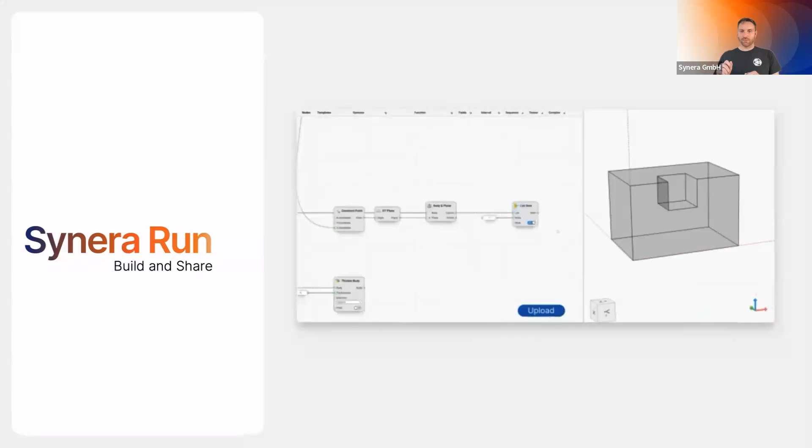So let's continue. What is Synera Run? Synera Run allows you to build, share, and reuse workflows within an organization. It's as simple as this: you still build your workflows as you're familiar with it. You define all your nodes, put them in the right order, and define your inputs and outputs. Then after you save it, you click upload.

Then the whole workflow gets deployed to a web instance, and this web instance is accessible via any browser in your organization. You can just share the link and give it to someone else in your organization, and they can reuse your knowledge, your automation, your workflow, what you've previously developed in Synera. To sum it up, it's really just these 3 steps: build your workflow and automation, share it via the web, and let all your coworkers use this kind of technology in a safe environment within your infrastructure.

We start with Synera Run in the web, meaning you just need a browser to access the workflows. The browser site you see here will dynamically create itself based on the workflow you've set up in Synera. So depending on what kind of inputs and outputs you defined, this workflow or website will auto-generate. You can just click deploy, and it's already there, ready to reuse and share with all the others in your company.

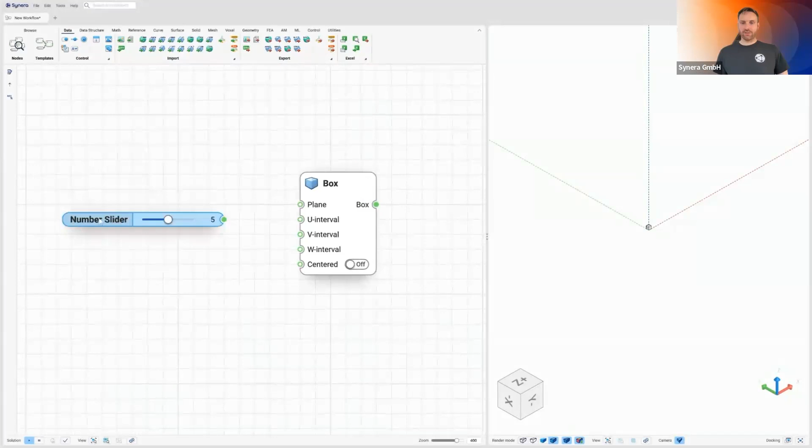And I think the best is to show it in action. So we prepared some demos for you to see how easy it is to integrate Synera Run into your existing workflows. Let's start with a very easy one, like a Hello World, just to show you the whole beauty. We will create a box here with 3 different variables, these are our sliders, connected to length, width, and height. We can change the sliders, and you'll see the geometry updates directly in the viewer.

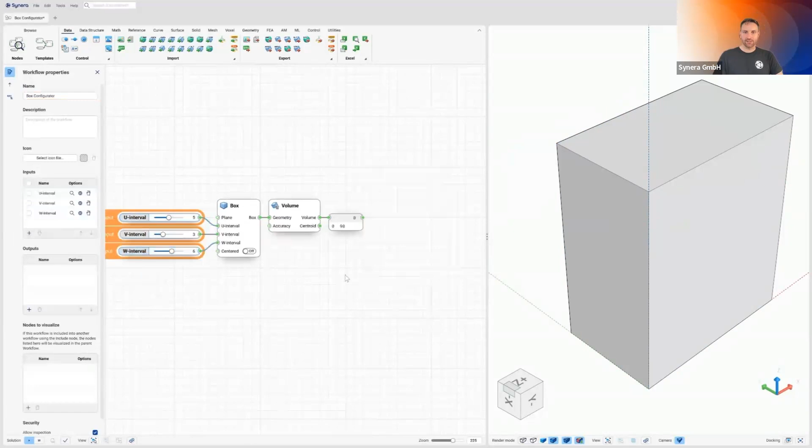And as a first evaluation, we just want to get the volume out of it. So what are the steps now to bring this into Synera Run? We have this new side panel on the left where you can open all the workflow properties. And then you set up the inputs, which get these nice orange surroundings. And then you have to specify the output, in this case, the number for the volume.

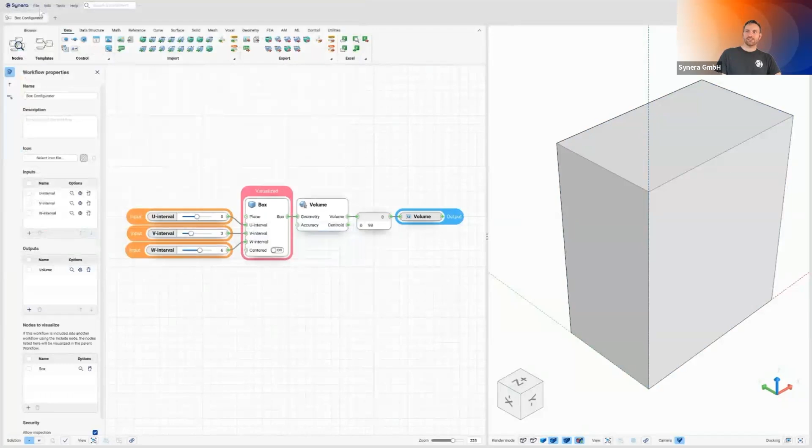We will rename the number container to volume to make it more obvious for the end user later in the website, and then mark this as an output with these blue surroundings. Now we define the box which we want to visualize in the 3D viewer. We save the whole workflow, and then it's just one click. You go on File, Publish to Synera Run, this machine, and that's it. You will get immediately the URL back, and your whole workflow is already deployed in the web.

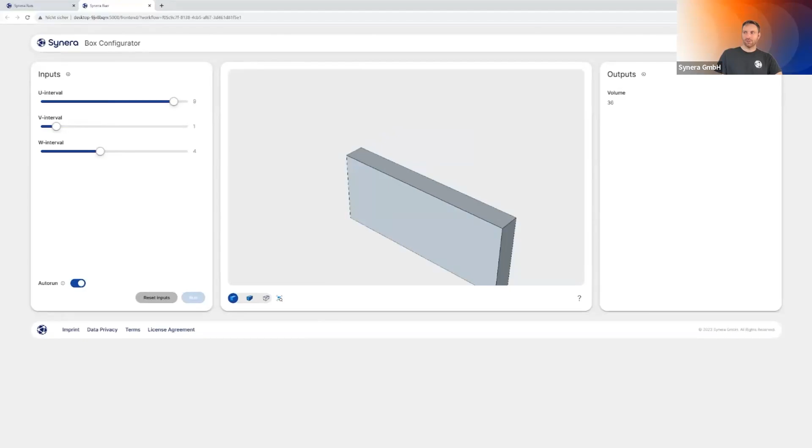You can use the viewer, you can see the preview here, you have all the input sliders. If you toggle the auto run button, you see the immediate actions and the output on the right with the volume as an output control. So this was just the beginning. You can really create all the workflows you have in mind now for the run environment.

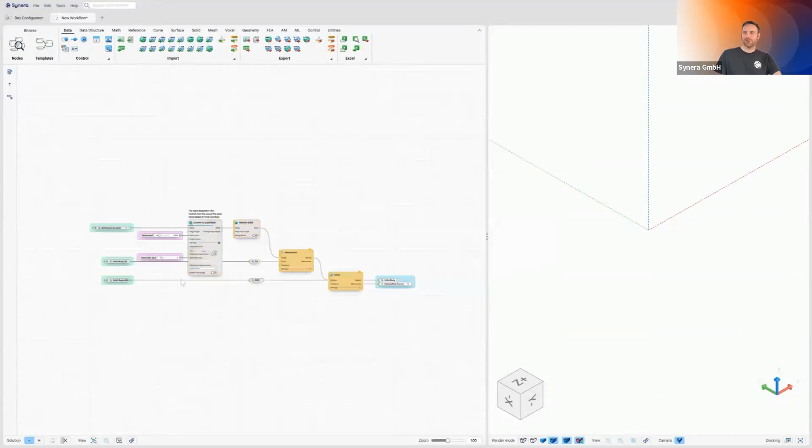And to show you another bestseller in our ecosystem, it's a topo reconstruction based on the convert to quad mesh and mesh to solid operation for the subdivision modeling. So what we are doing here, we grab this template from our template engine we presented last time. We just rename the input as a mesh. And normally we want to give the people the possibility to get an OBJ file and a STEP file. So you do not even need the export OBJ. You can just grab a mesh container as an output and a solid body as an output.

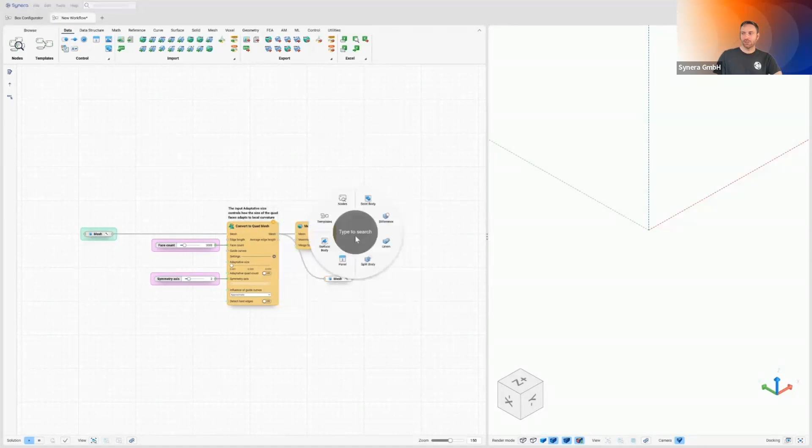And then it's really the same routine as I have shown you before with the box. So you open the workflow properties again, you give it a name just to make it easier for your end users. Then you define the inputs on the left, in this case, the mesh, and the solid body and the mesh on the right. You see the blue surrounding again. Then I will show you how it will look.

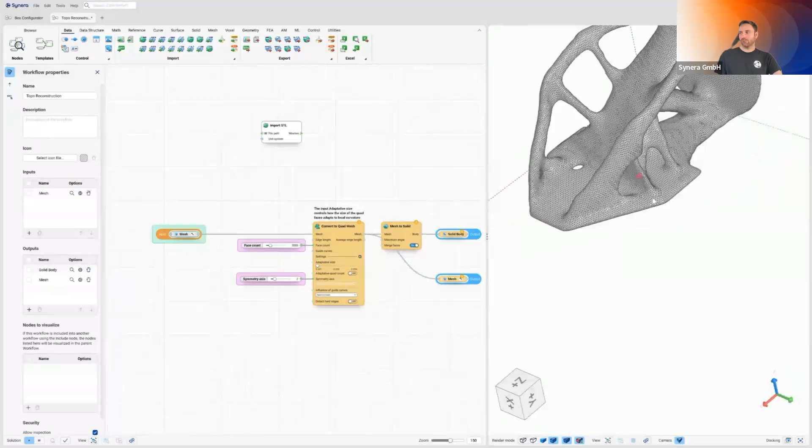So this could be a model you would like to process with this algorithm. So this is an STL. You put it in the mesh container just to see what you will expect when you process this kind of geometry. And when I now toggle the visible nodes, you see this is a NURBS geometry you would like to get out. And now we save it, and we want to deploy it again in Synera Run. So we click on it, and here we go.

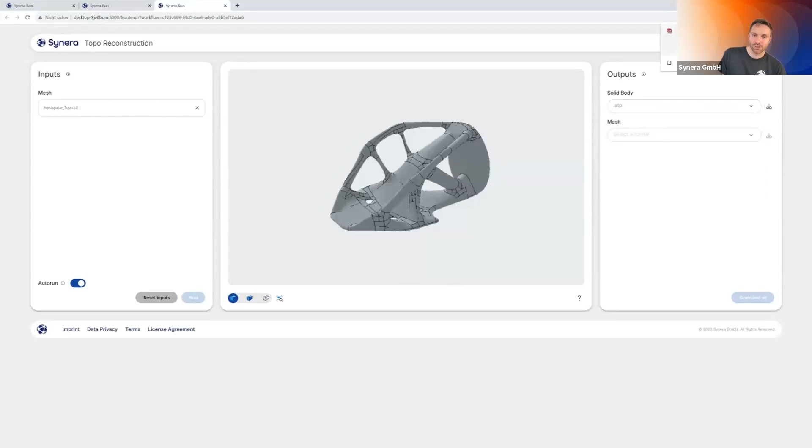This time we have a nicely designed upload dialog, so you can select it from your hard drive, then it gets uploaded, it's directly computed. You see the preview of the subdivision modeling, and the 2 containers allow you to download it in any kind of file format you have already pre-installed and also licensed. We are always really curious to see what you will do with this kind of technology and what kind of workflows you bring in the Synera Run ecosystem.

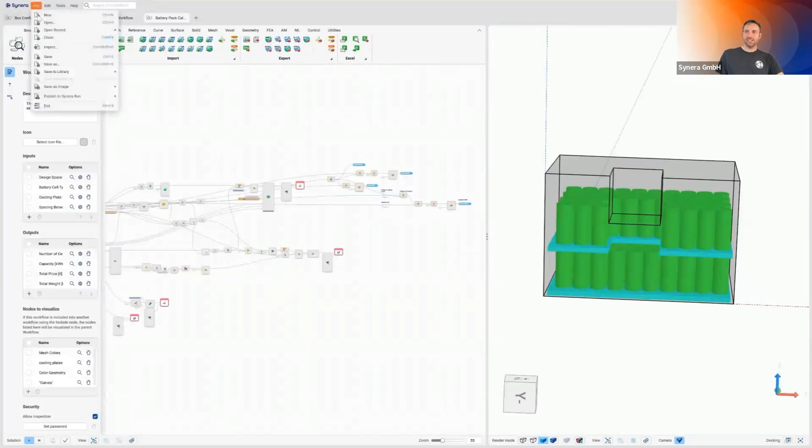Here's a more sophisticated one with a battery nesting algorithm, but it's always the same. So you define your inputs and your outputs. This time it's already predefined. But here we are not publishing this in a local network. This time we use it in our global network, and we open up the firewall rules. So now everyone can access this kind of workflow.

So you see, again, you have select commands, you have slider commands, you can change the input controls, you can toggle the auto run or press the run button, and you see the computation is then done on the server. Here's a new nesting result from the battery one.

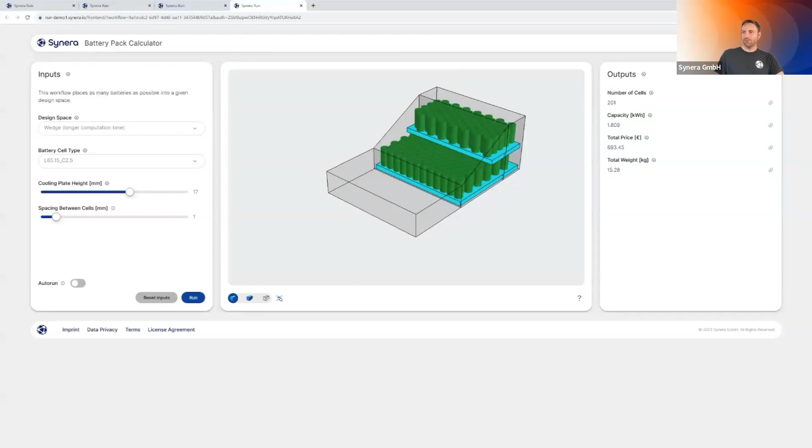And as I mentioned, for this demo purpose, we open our firewall rules. So when you go now on run.synera.io, and maybe Marvin, you can put this also in the chat while I'm speaking, you can really access the same workflow I showed you 1 minute before, and you can reuse it in a web environment, even outside the company network.

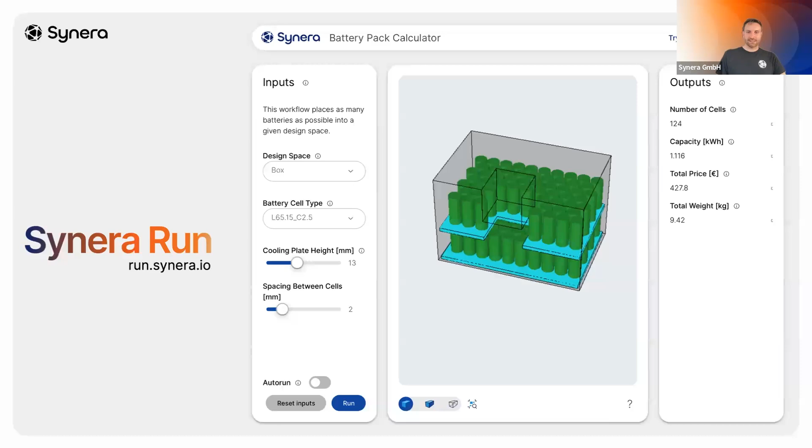So next, this is Synera Run, and we are really thrilled that we gave some of our power users early access to this technology. And today we have Heinrich Schmidt from ARRK Engineering, who will show us how he's already utilized this new technology in their daily work and how they make workflows powerful in this web environment. So Heinrich, the stage is yours.

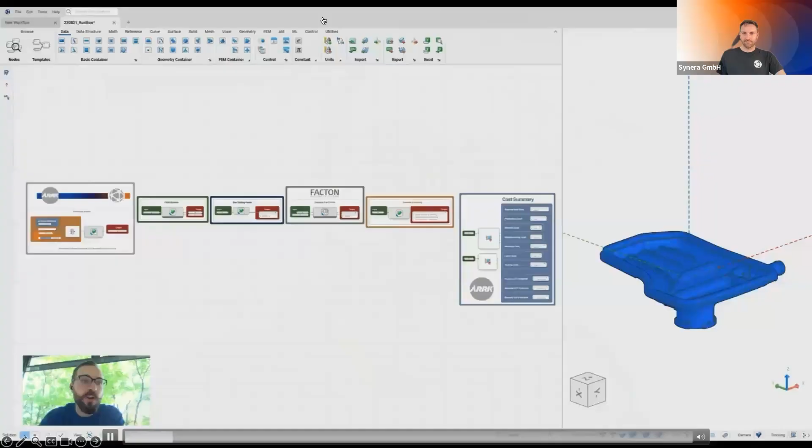I'm the consultant for all the Synera topics, and I'm presenting to you today the Synera Run with my little design to cost workflow. So let's just jump right into it. So we start with a little purchase prompt. So which part are we calculating? How many parts do we want to calculate?

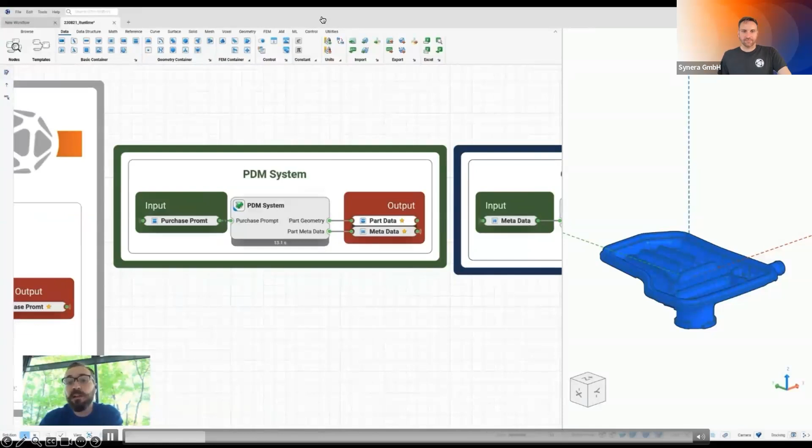Then we grab the CAD data as well as the metadata for the part from our PDM system. The metadata would include such things as material, the maximum wall thickness, and so on. And we needed some further calculation, and we jump over to the tooling cost. We received that from a third-party software.

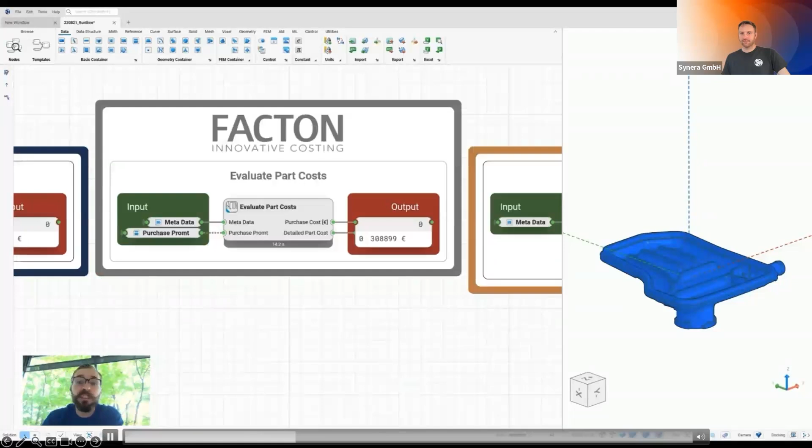And then at this point, a little cross-promo for Facton. So they've been so nice to give us access to the API to calculate the production cost of a single part, which is pretty neat. And it works pretty good, I have to admit.

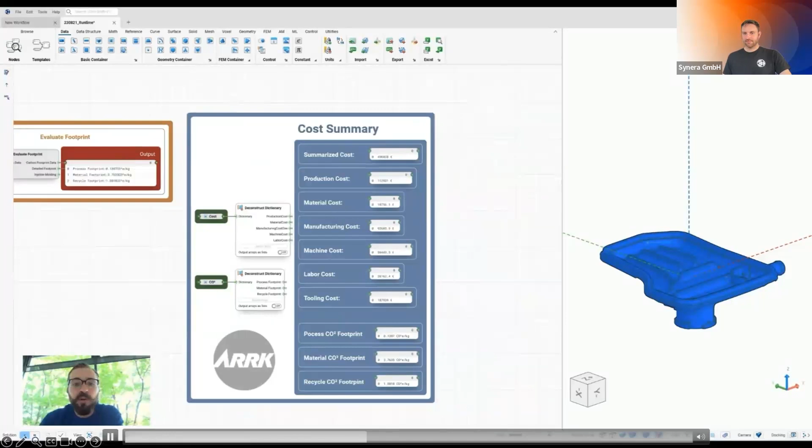And then we go on to the CO2 footprint, also another third party, and receive our environmental cost for the parts. And in the end, we receive a cost summary of the whole part, which includes the production cost, tooling cost, the environmental cost.

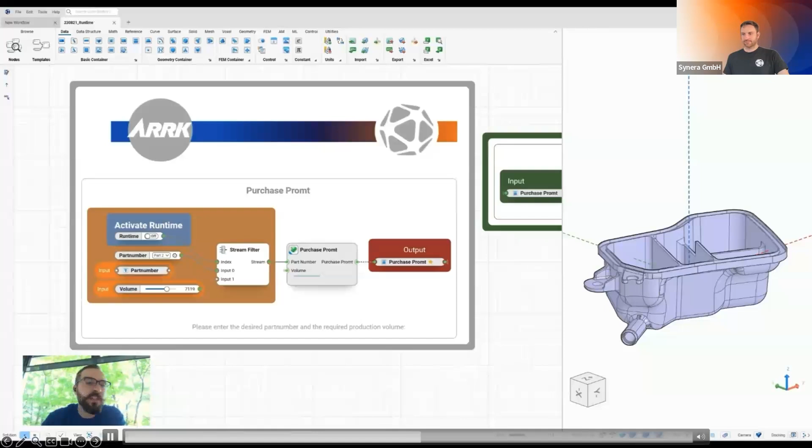And now we get to the interesting part, and we want to publish the whole thing to the Synera Runtime. For that, we implement a little toggle at the start, so we could change the inputs. Is it within the workflow, or do they feed it from outside? So like a run. So we activate that toggle, and then we publish the whole thing to Synera Runtime by just clicking File, Publish to Synera Runtime, and to this machine, and it's actually done. So we could jump over to the Runtime, which would look like this.

On the left-hand side, we see the inputs we defined previously. It's the same systematic as in a classic workflow if you want to nest it. So you have to define inputs, outputs. It's 2 clicks. It's easy. And then to run the Runtime, we have to add the part number as well as the volume of parts we want to produce.

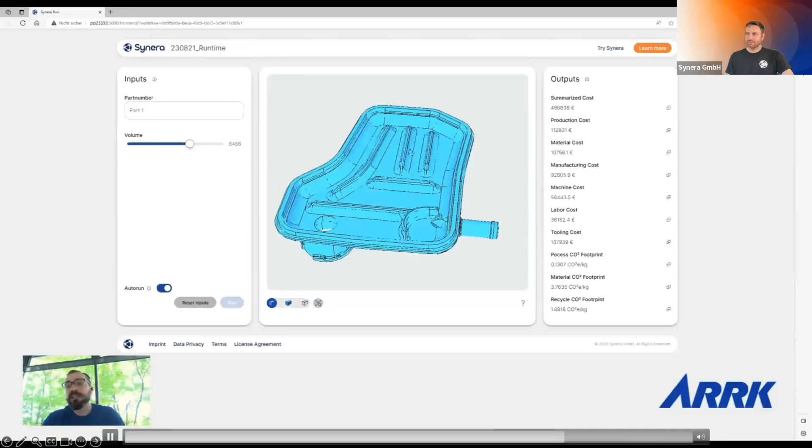Then the running. And we see in the middle our part. It's a classic 3D viewer you're used to from the desktop application. And on the right-hand side, you see the costs we calculate within the workflow. And if we switch now the part, it's recalculating, and we receive yet another cost calculation and CO2 footprint.

And that's actually already the Runtime. Easily done, literally within less than 5 clicks. So I think it's pretty handy. It's easy to use, and I hope to use it in future quite more often.

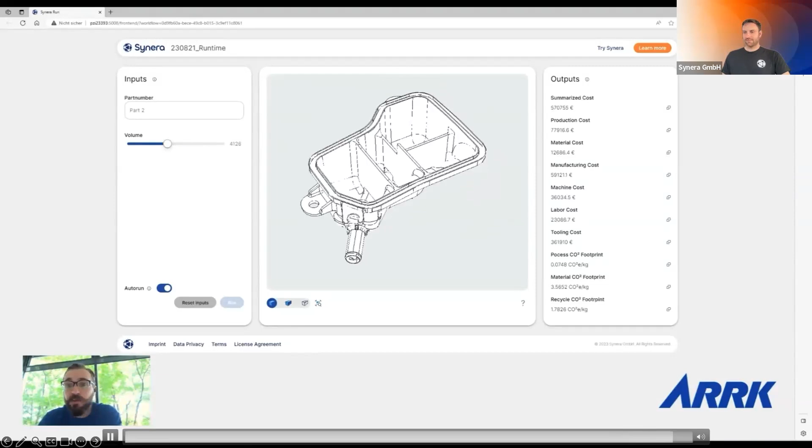So cool. Thanks, Heinrich, for these insights. I mean, he just deployed a cost engineering workflow within seconds in the Runtime environment. And the beauty is that especially in cost engineering, you have a lot of people who would love to get access to the volumes from CAD geometries and all this stuff, but they normally don't have access to CAD geometry or CAD tools. So with this, we can fill a gap here and use Synera Runtime to make even cost engineering workflows available to people who are normally not familiar with CAD operations.

So Synera Runtime, the big question, when is it available? I mean, it's brand new and it will be available later this year to everyone. And we are opening our beta access program.

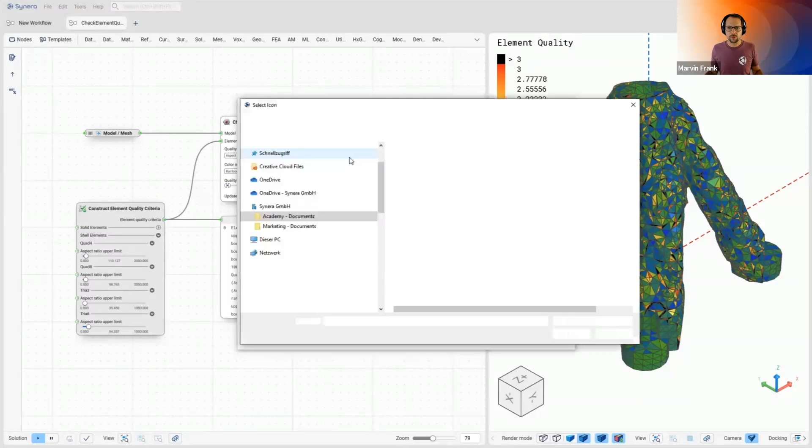Go to Tools, create a new library. So yeah, we can give this library a reasonable name. And we can also set an icon if you like for this purpose. Of course, I would choose a FEA icon. I can give a library description. And in the end here, I choose a file path, in this case to a SharePoint, because I want to cooperate with other users. So final check if everything is good to go, and then we can create the library.

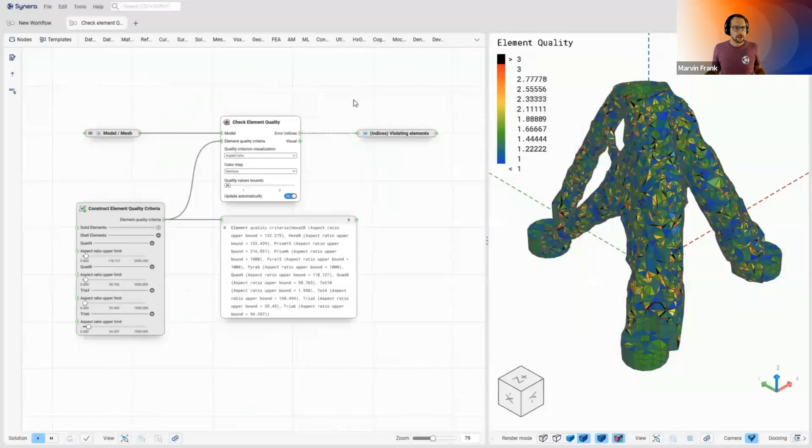So here I have my workflow, and then I save it, and I just save it in the library I have just created. I can also give the workflow a name, and you can see in the blue banner on top that it is saved in that library. So if I open a new project, a new tab here, that workflow is directly accessible through the radial menu.

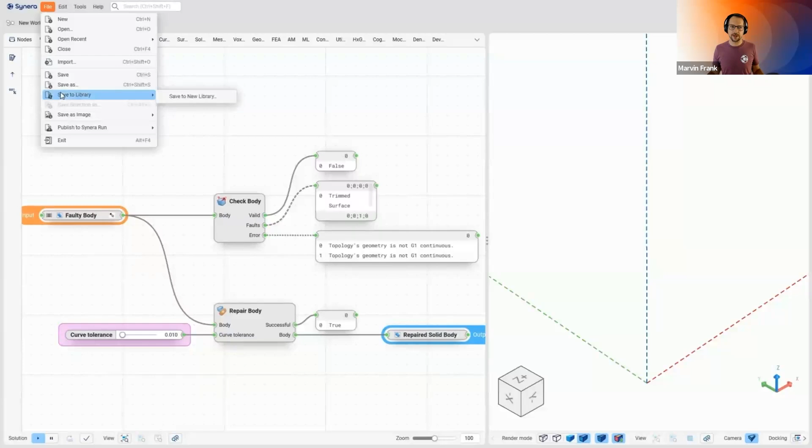Okay, so now user 2. We have a second user, Daniel. Daniel is a CAD expert in another department and has a similar repetitive task, checking a body. So this time Daniel wants to save this workflow as a node, so he defines inputs and outputs. And instead of creating a new library, Daniel chooses the direct way through File and then creates this new library, gives the library a name. Here is the CAD library, and also chooses a path on our SharePoint, the CAD folder in that case.

So a name is given to the workflow. It chooses that automatically from the workflow. We can save it. As you can see in the blue banner, again, it's saved. And similar as before, I go to another project, and also user 2, Daniel, has direct access to his CAD library and to the node he has just created out of that workflow.

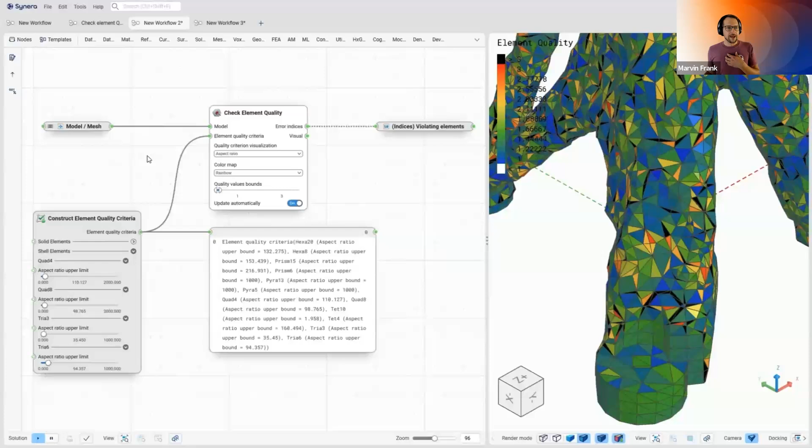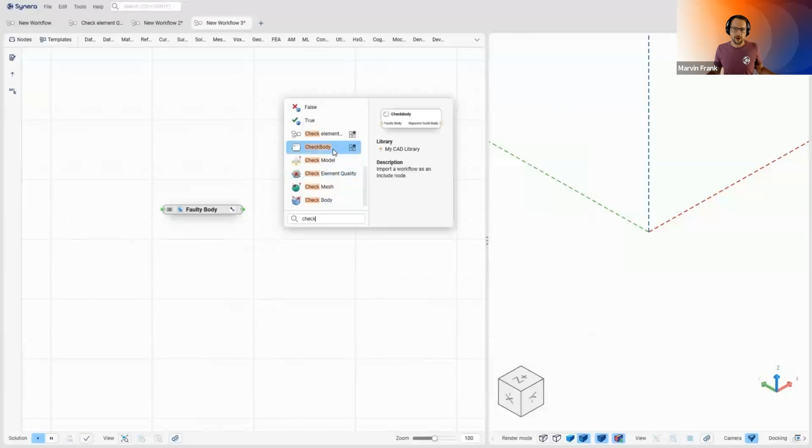So back to user 1. I have a faulty geometry, but I can't wait now for Daniel to fix it for me as a CAD expert. So now I can use his expertise, and he saved that in the library. So I can just integrate this library with the ones I had before. So now I choose the file path, and you see the CAD library is next to the FEA library. I like that. So now when I go to the radial menu, I also have access to Daniel's expertise and can use the node he just created, and I can check the body for myself. Yeah, that's the total story.

So we saw collaboration over the SharePoint, but in enterprises, it's not only the SharePoint where we can collaborate. So we now have the PLM integration for Teamcenter. Automation workflows or cooperative work means that we need to interact with these PLM systems, and we are super happy that we can introduce the Siemens Teamcenter integration. So in the end, it is only 2 nodes. Very easy. We pull from the Teamcenter and we push to the Teamcenter. And yeah, there's a little story behind it.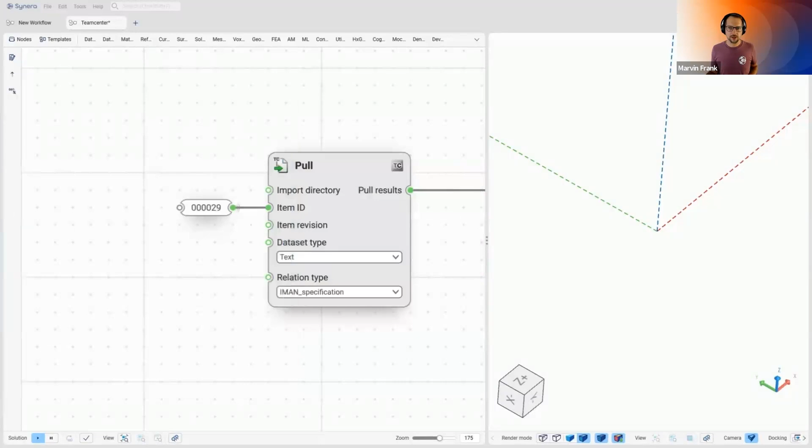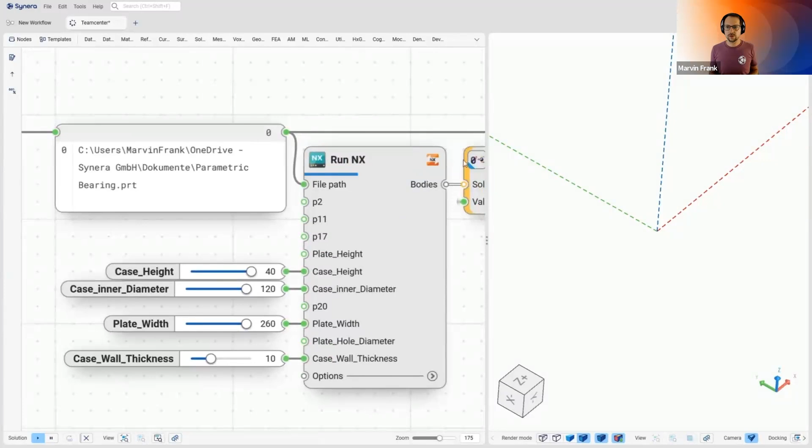So let's check it out. Here you see the Teamcenter. Here's some file and asset created in the Siemens Teamcenter. And at first you define your item ID and you pull that item from Teamcenter. It's an NX file, a geometry file. So here we use our runNX node. We have now imported that, but we are also able now to change the parameters. So that is done very quickly here.

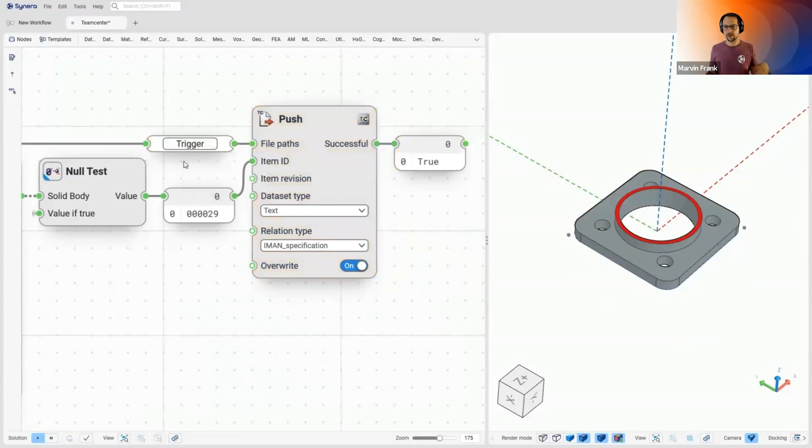We change the parameters of the file, the geometry updates, and when that is finished, we can push it back again. So here we trigger that, push it back again, and then the updated file is back in the Teamcenter and ready to be used by other departments. Yes, that's the whole story. So it's about creating, sharing, and reusing between colleagues and departments on the workflow level, but also on the enterprise level through the communication, in this case, with Siemens Teamcenter.

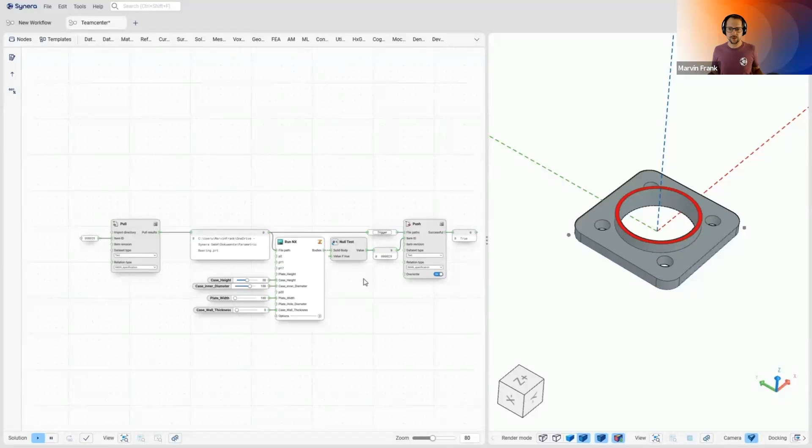All right, cool. We have the last category for today, right? The last category for today, and for that, we'll give it back to you first, and let's see what else we have in the improvements. Yes, so the last category is shared by Marvin and me. So it's our general improvements. We have tons of smaller improvements done over the last weeks. And to give you a glimpse of some of them, we created some slides.

And another workflow where you could use these new nodes is to measure the time, like how performant is your current workflow. You have a start and you have an end, and then you can measure the computation. And here at the end, for example, this small hello world product, 5 seconds. So a lot of possibilities with these new nodes. Have fun with the time nodes.

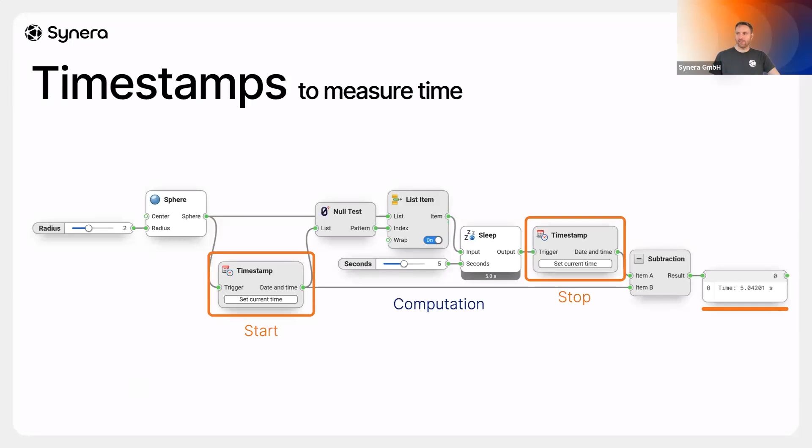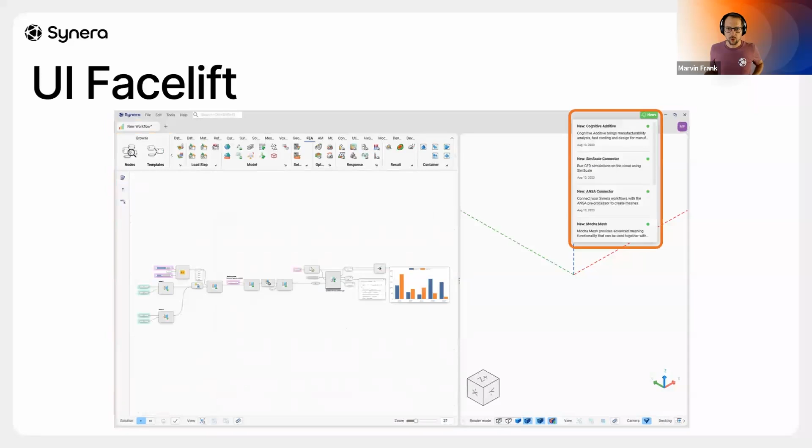Okay, then we have another new improvement regarding the viewer. You remember last time in Geeky Gaia we had already one. I think there were viewer performance improvements up to 50 times faster regarding bodies or surface bodies to spin around in the viewer. That is because our customers challenge us more and more with more complex workflows and more complex assemblies and geometries. So here we have something more.

So this time it is regarding FEA visuals and points. And we had very heavy benchmark data. They appeared to have an average frame rate of 1 frame per second in the very heavy data. And now we managed to improve the performance up to 36 times, with an average frame rate of 36. And so larger FE models and point clouds can be visualized much better now.

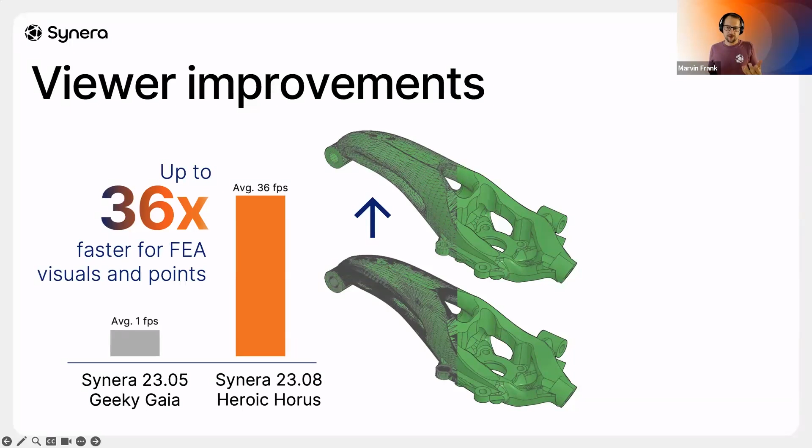So that is generally better for computational time. And we managed to have up to 97% fewer primitives after this tessellation for these solid or surface bodies. So hopefully when you have something really heavy to display, this gives you a little booster.

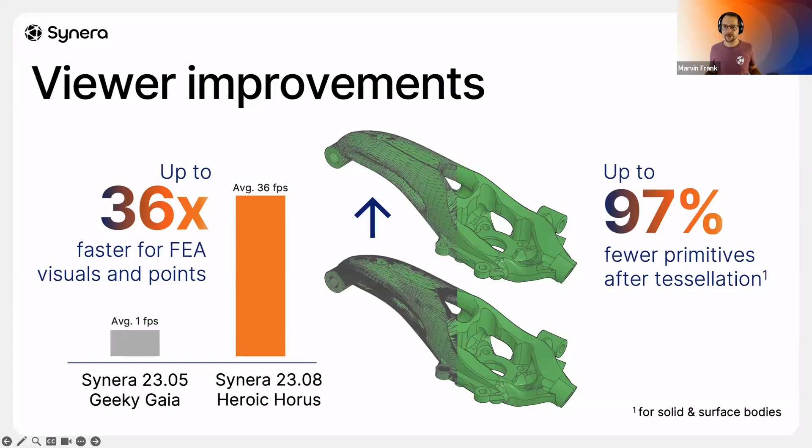Okay. Another very interesting tool, I like it a lot because, when you sketch and you think in processes as you usually do in low-code and in Synera, sometimes you have to start one step earlier. So to sketch, for example, processes, but you can also use this tool to document a bit better in your workflow. So now we have integrated a whiteboard.

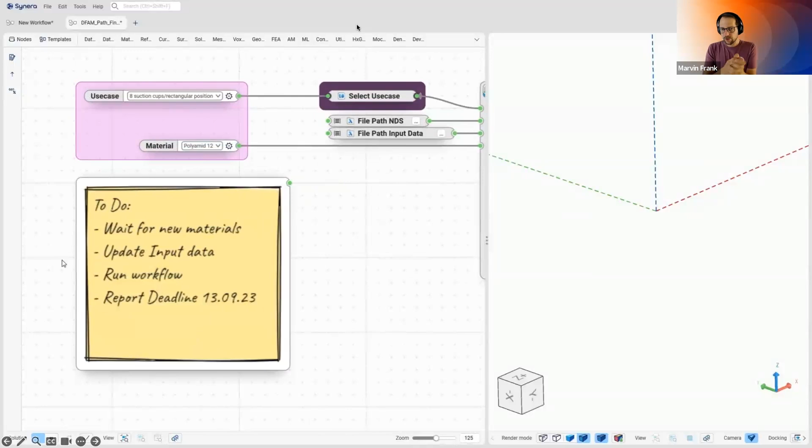And for this, let me show you also a little example. So this is how it could look like in the end. A larger workflow. Here we have a big workflow, and we see, for example, at the beginning, there we have a to-do list. For example, I want to document something for my colleague, or I have another idea for the process that is included in this particular node.

Then I want to add some sticky notes here for my colleague to clean this up, or for myself, or also hard copy something to keep in there. So to use the graphics, but having that directly inside the workflow.

See, okay. Thank you.

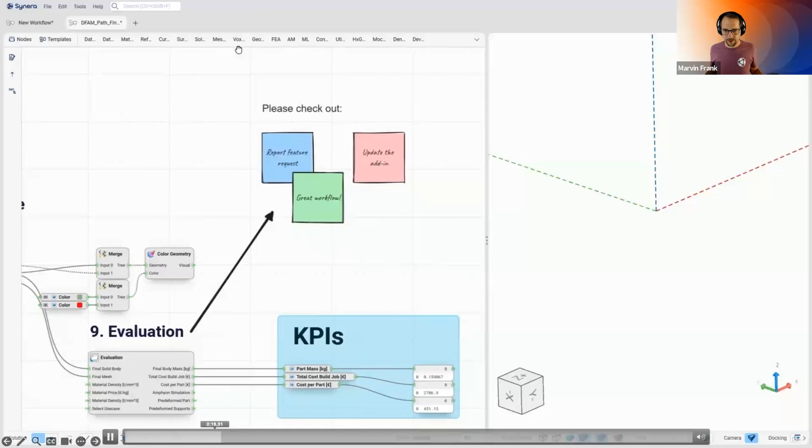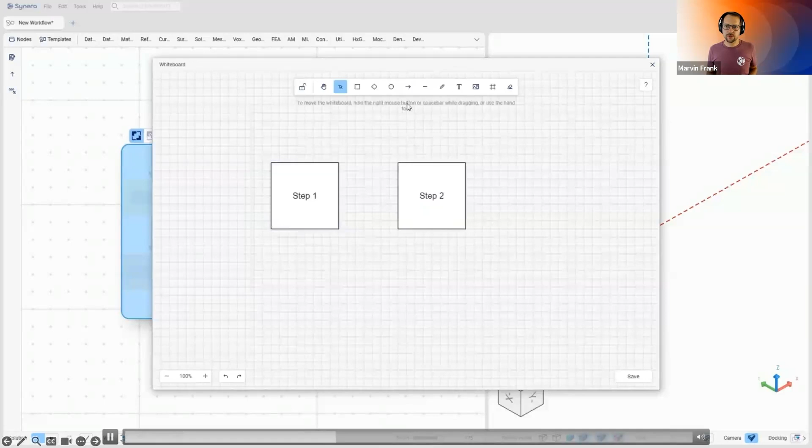Okay, so let's see how it works. You can find that under utilities and canvas, and there's the whiteboard panel. It appears, and then you can click it, and there's some familiar features you might notice. So you can draw some boxes, then you can assign colors, set the opacity, things like you're used to. And for example, here we just quickly set up a little process, step 1, step 2.

You might have another sub step here. And if you're done, you just click save. It gets in the whiteboard panel. Then first in the settings, you can fit the size to the actual process you have built up here. And you can copy that, like hard copy that as a picture. And you can also save that as a picture to your local drive.

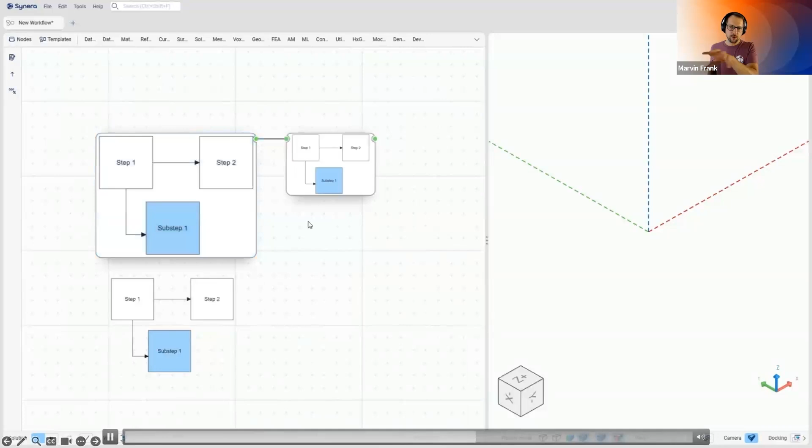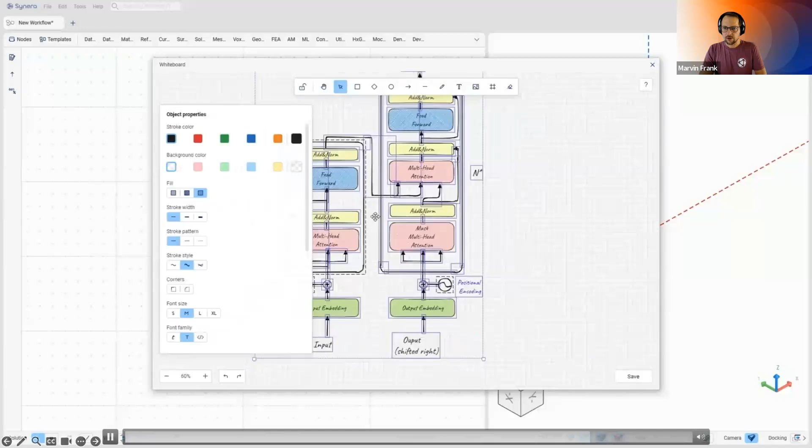Okay. Of course, you can use that using the viewer panel and other spots in the workflow. But the interesting point here is that it is an open library. So when you go to excalidraw.com, if you want to have more features here, you can choose anything you like from that open library. For example, this little sketch here, I really like that to document something in my workflow. I copied that directly inside the whiteboard panel. Click save, and it's available as the other process I drew before.

Yeah, similar with anything else. So there are more libraries, so you can just go there and type something in, like I just want a simple sticky note. You add it and you use it as before. Okay, so I'm really curious how you're going to use it and how you're going to nice up your workflows with this tool.

Okay, another very, very little node, but it has a huge impact if you build especially larger workflows. So while you develop it, the careful listener or watcher of that webinar has seen the little spoiler before in my presentation, but it's the trigger. So it's a very small node. And let's see how we did it before. So imagine you have a more heavy operation like the convert to quad mesh and the mesh to solid. So that might take some time.

So if you want to adjust some parameters, of course you can pause and play also your workflow. What you usually do when you create the workflow is that, for example, you disable a node, something like this. So I disable mesh to solid and I can change my parameters. That would be an option. I can also disable the cable, which is cool, but also very tiny. So not so easy to spot for maybe a colleague that you want to share the workflow with.

But now you can just insert this trigger here. So that is how it looks like when it's closed. No data is flowing, so you can play around with the values of the sliders of the convert to quad mesh. And when you're happy with the setting, you can open it, and then the workflow runs through.

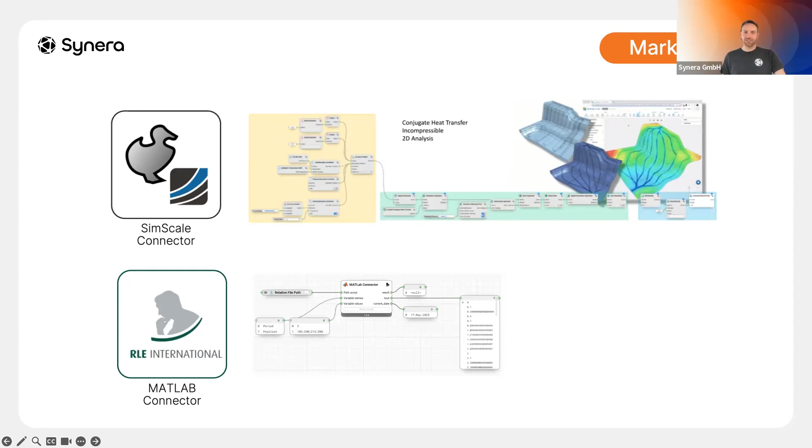So in the next couple of weeks, you will see a lot of movement in the marketplace, and hopefully in the next release candidate presentation we will also have some deep dives here.

Okay, that is the marketplace. And to sum it up, this was the new release keynote presentation, 2308 Heroic Horus, with Run, with a lot of marketplace updates, with the new timestamp nodes, Teamcenter integration, a lot of node improvements, and the whiteboard feature too, especially in the early days when you start with Synera and want to sketch your process first and then remodel it. It's very powerful. And the reuse library, which allows you to spread the knowledge from Synera across different departments and reuse all the programmatical workflows you already created.